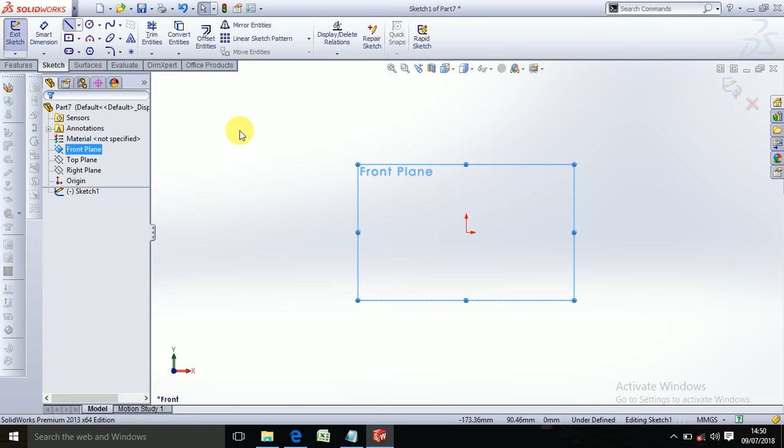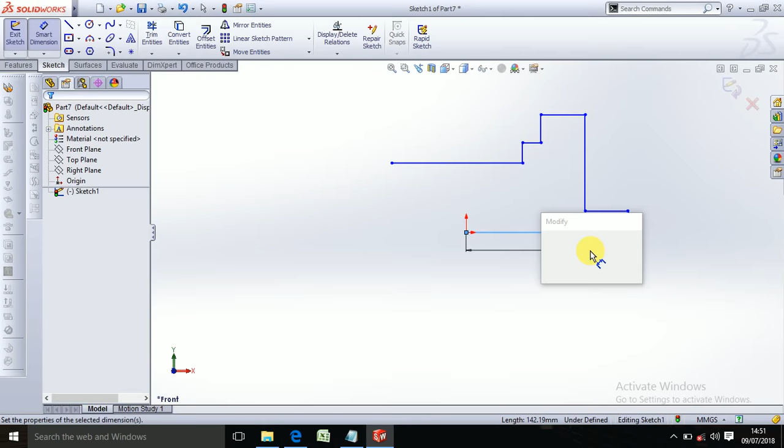Okay, exit. Now we will give dimension to it. This will be half of 208, so 104 mm. You will find the dimension in the PDF, so please have a look.

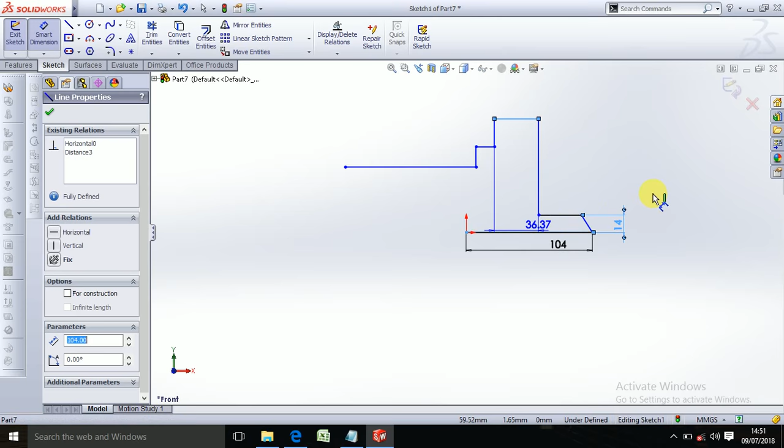And the distance from this line to this line will be 14 mm. The distance from this line to this line is 68 mm. We will call it 68 mm.

Okay, so this distance we have made like this. After that, we just take a center line from this point, from the origin point, going upward vertically.

So let's just select this line and make it vertical relation. Okay, we use trim and trim this entity. Okay, then we just draw this.

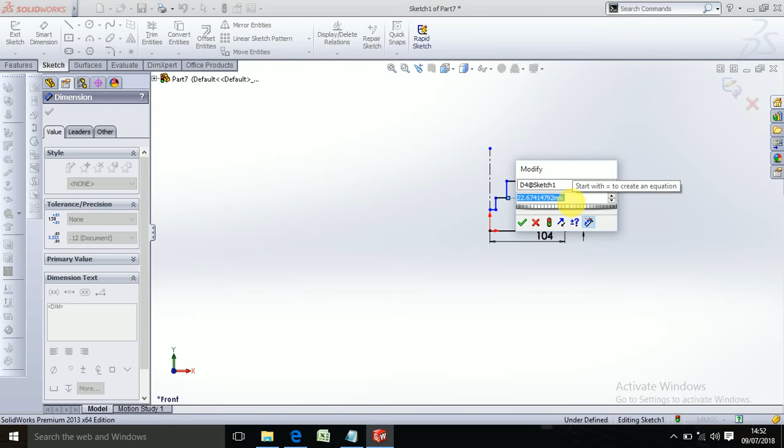Now we just take some dimensions. This line, this point to this point, the distance is 16 mm, I think. Okay, yes, it is 16 mm. Then from this point to this point, this line is 4 mm. Okay, yes, so this is the drawing.

Okay, so first we use this mirror command on these entities.

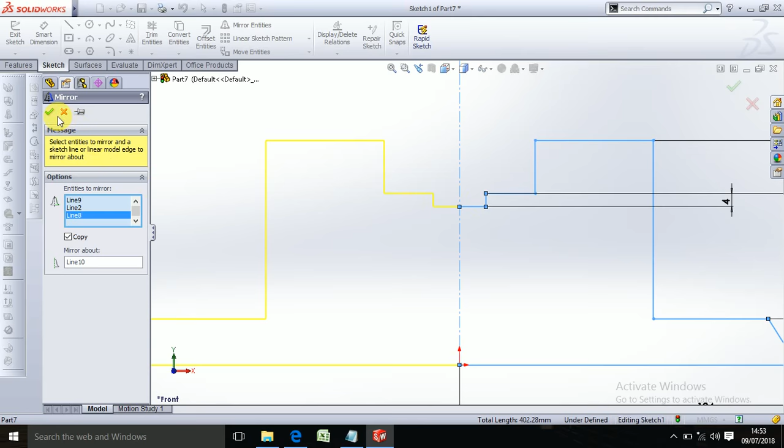Okay, so we just mirror this surface over this surface.

Again choose - first delete this, again choose smart dimension and we choose the whole length of the line, 208, because we need to show it fully in the dimension.

So let's take a center line about this point. Let's take a center line from this point, then smart dimension from this center line to this line. The angle will be 106.

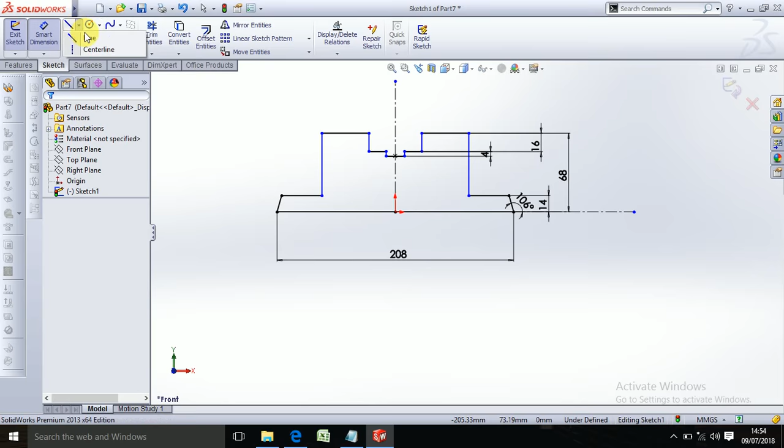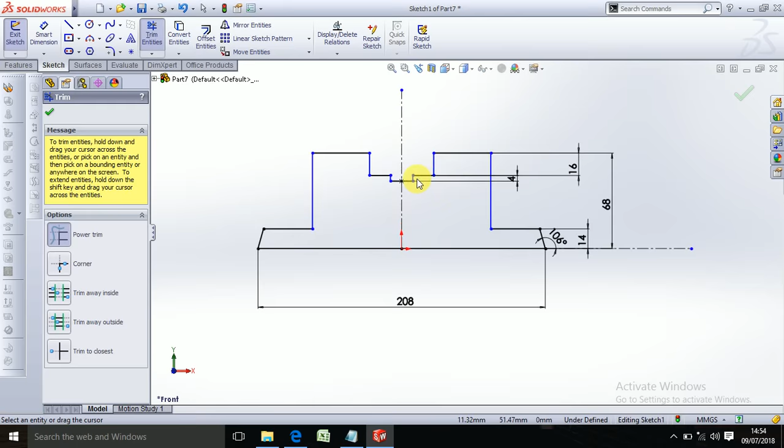And trim this entity. Okay, now we just take a circle over there from this point. Firstly we select this point. The distance from this point to this point is 56 mm.

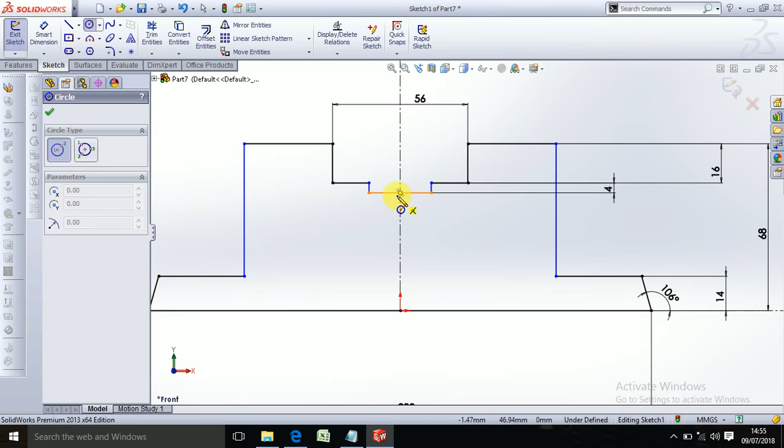Okay, and the distance from - yeah, just take a circle from this point, the radius of 24 mm. Okay.

Now just take trim command, or yeah, just take trim command and trim this entity, and then choose a center line from this point to this point, actually from this point to this point.

Okay, now choose a line from this point. Okay, again choose a line. Okay, from this point to this point, and again line command. Okay, sorry, from this point.

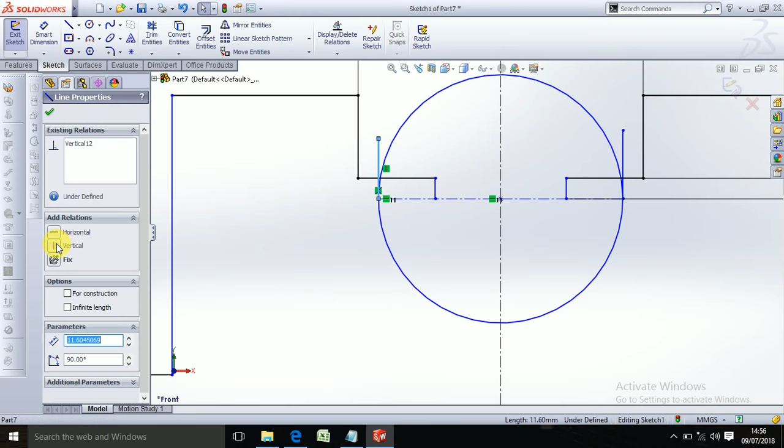Line command from this point to this point, make relation vertical. Okay, again this line, choose this line, make relation vertical. Okay, now use trim command and trim this entity. Okay, and we don't need this, so we delete this point.

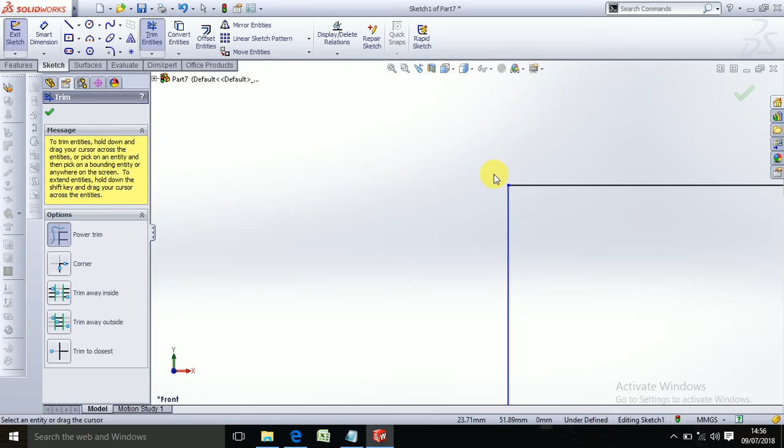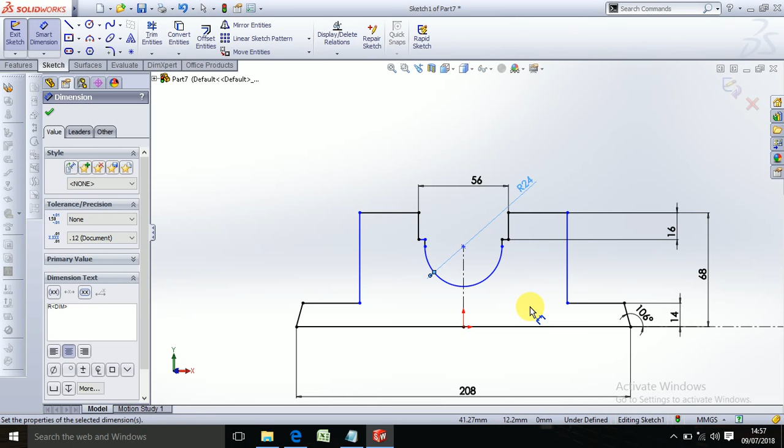So we just have to define this circle, radius is 24. We just have, okay, we have defined every single thing. So we can extrude this command, extrude this entity about this point.

Okay, let's use extrude, and we can extrude it up to 46 mm according to the drawing. 46 mm.

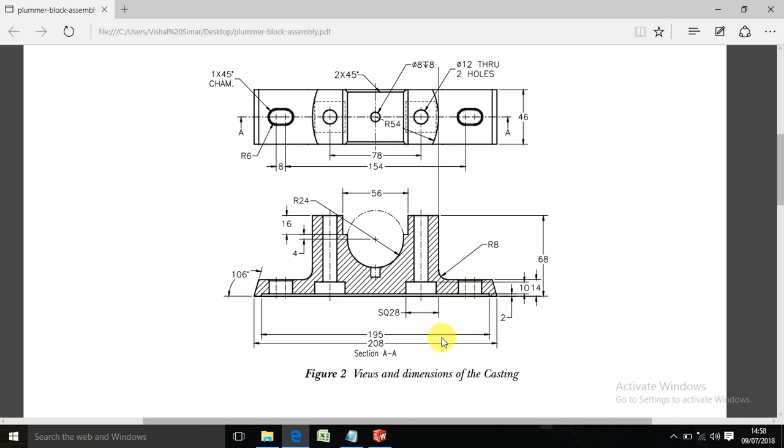So firstly we have to draw a shell, use this, and I use a center rectangle for this point, and from this point normal to, and yeah, just take a center line from this point, sorry, center line, okay, from this point to this point.

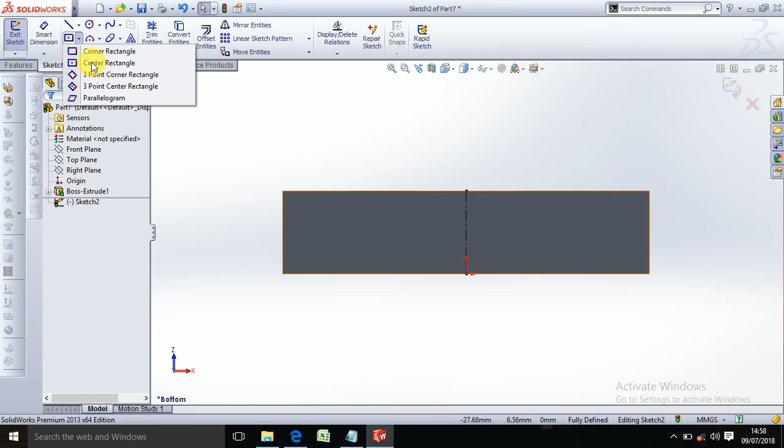Now it will be easy to take a center rectangle from the center point, center rectangle, and yeah, from this point to this point.

Okay, now just define this, take smart dimension, and I have to take this point to this point is 190 mm, sorry 195 mm. Okay,

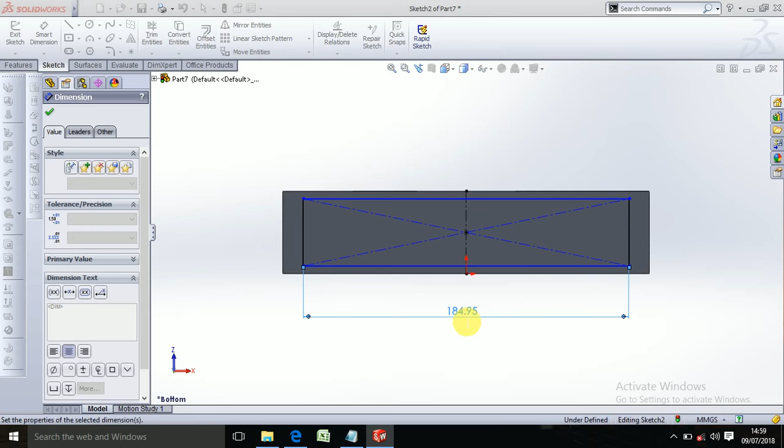and the distance from this line, again take smart dimension, sorry, sketch and smart dimension from this point to this center point or center line. It's just half of the 195, so 195 divided by 2, it's 97.50 already, it is okay.

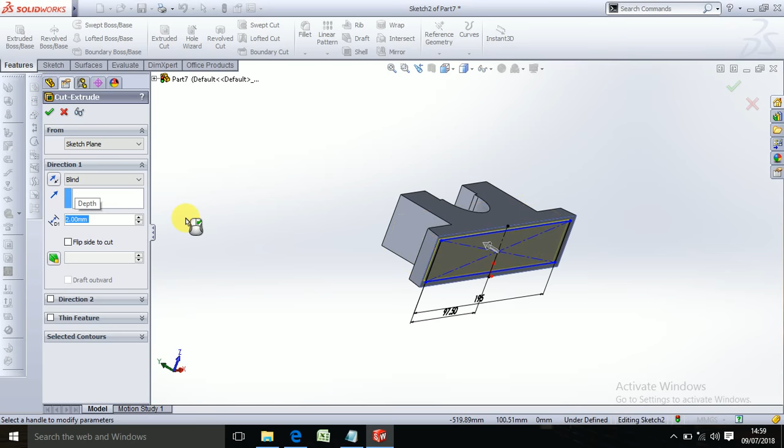So then feature and extrude cut. We can also use the shell command, but we use extrude cut over shell command here. Extrude cut to over 2 mm in the upward direction. Okay, so as you can see, there is a slot cut in this surface.

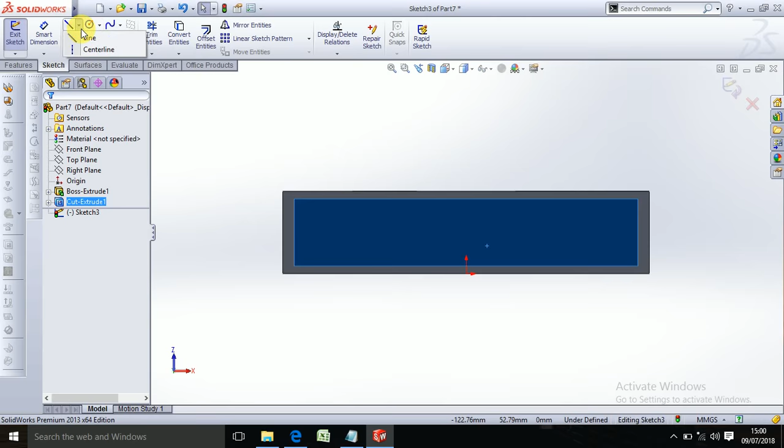So again sketch this surface, sketch normal to, okay. We can take a center line from this point to this point. Okay, now we will just take a center rectangle about this point, about the center of this point actually,

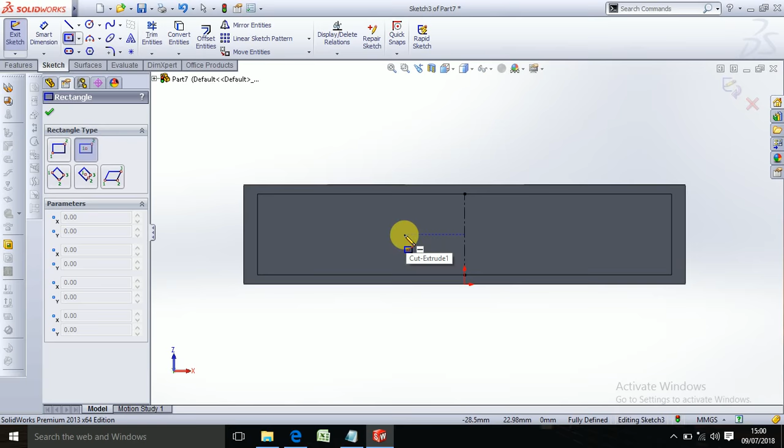yeah, center of this point, okay, and define it at 28 mm, sorry, 28 mm, okay, and this line will be 28 mm.

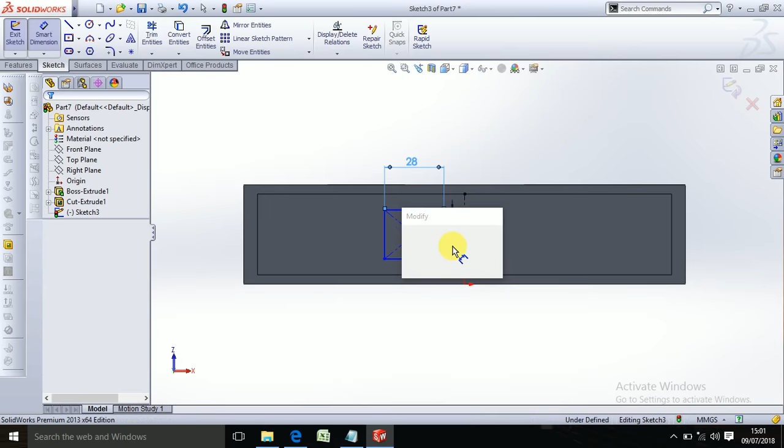Okay, the distance from center to this point will be 14. It's already 14, so we don't need to do that again.

We need a similar entity about this point over this surface, so mirror entity: point will be clear selection, and select the line, select the whole square, then mirror about this point. Okay, mirror done.

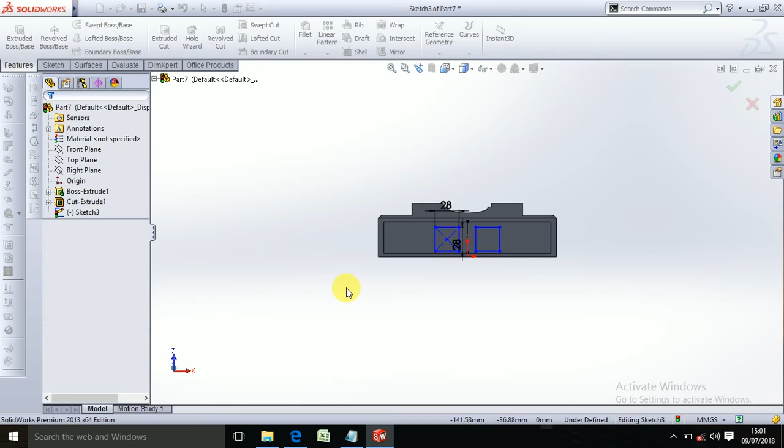So again use extrude cut, sorry, firstly we have to define another sketch, normal to, yeah, we have to define the distance from this point to this point. So we need

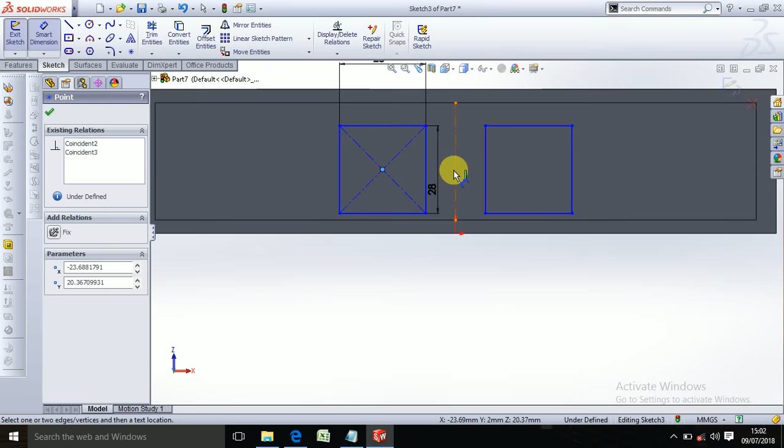from this point to this point, first we have to take dimension from this point, center point, actually smart dimension again, we'll just choose this line, this line will be half of 78 divided by 2. Okay, so as you can see, I have given dimension only on this side, and as it is a mirror entity, it will take the dimension automatically.

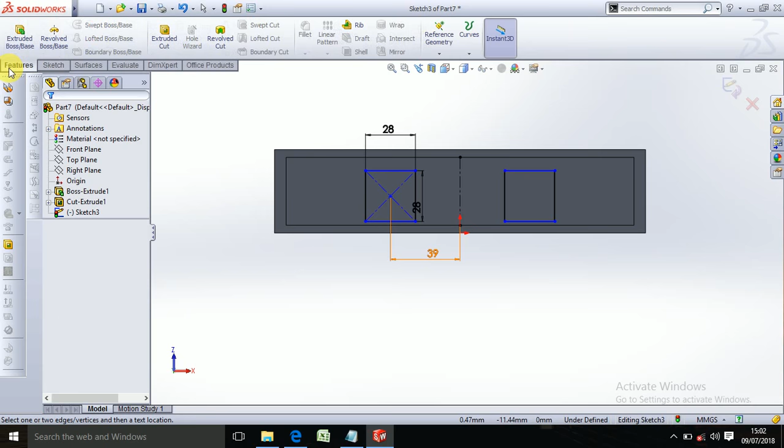Okay, then we extrude cut it. You have to draw a slot up to 10 mm. Okay,

we just have to draw, okay, now we have to draw a slot over this point, so I select this line again, sketch normal to.

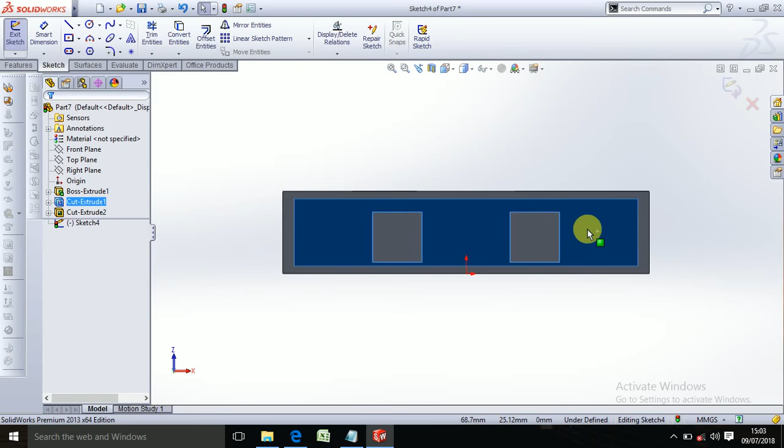So we can take a slot from this straight slot, and we can draw this from one point, define another point and the radius. Okay, so we can take a center line from this point,

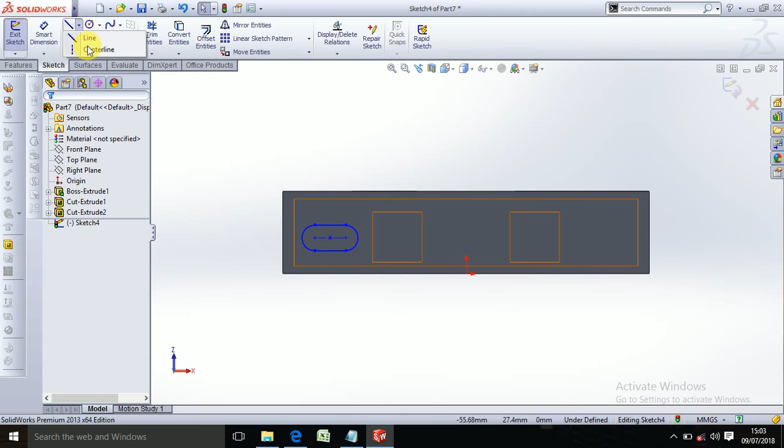we need a center line from this point to this point, and okay, now the distance we have given from this point to this point will be 8 mm only. 8 mm.

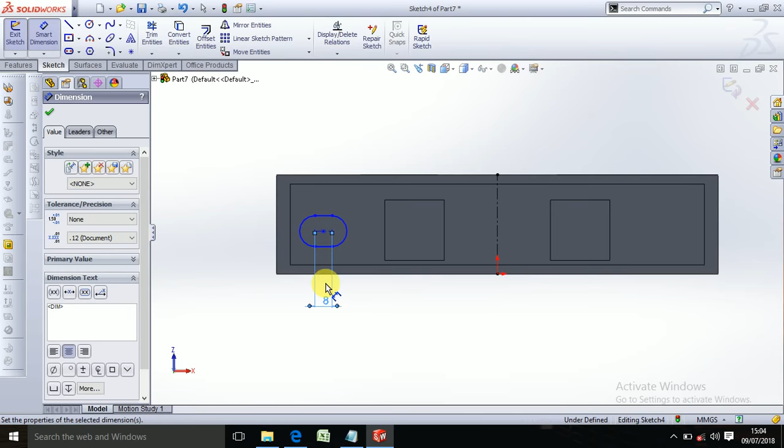Okay, now the radius of this circle, uh, this arc will be 6 mm. Okay, and this will also be 6 mm by default. Okay,

and again use mirror entity, and I want to mirror this slot over this side. So again use center line and mirror about.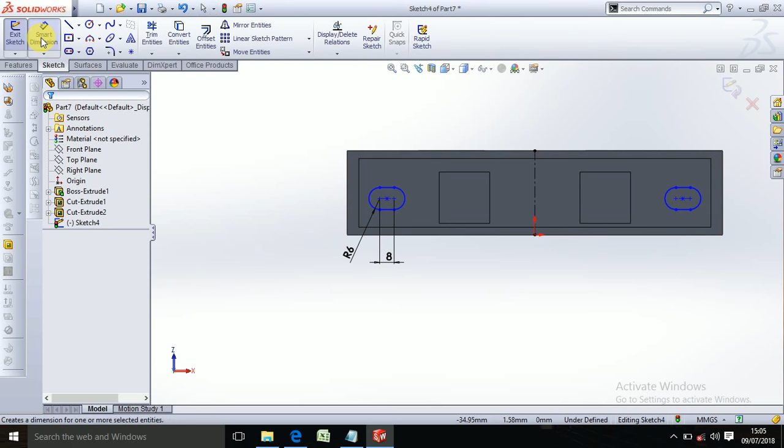Okay, so the distance from this point you have given, center from this point to this point we have a distance of 154.

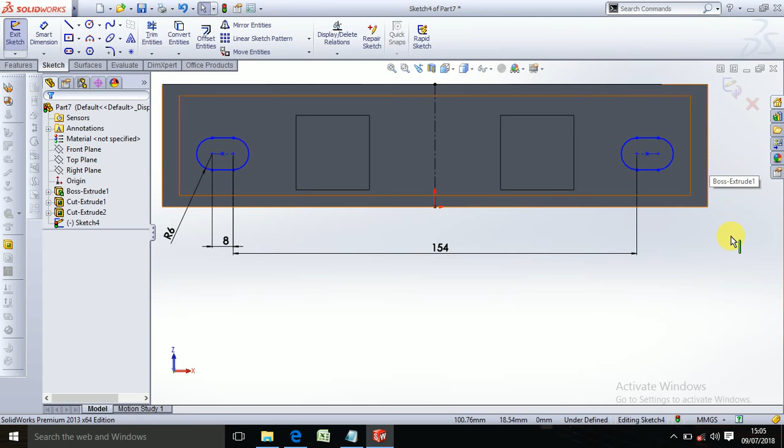Okay, so we don't need to take distance from this point because we take the distance from middle to middle, so it is already aligned. So then use feature, extrude cut, and just select through all. Okay, so we have created the slots in that area, just like that.

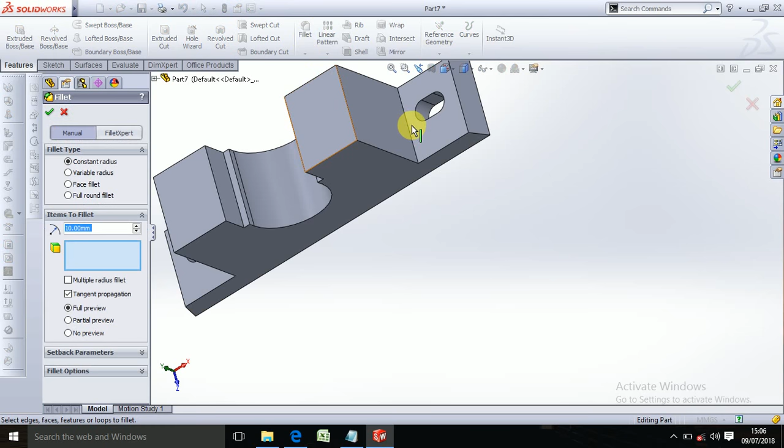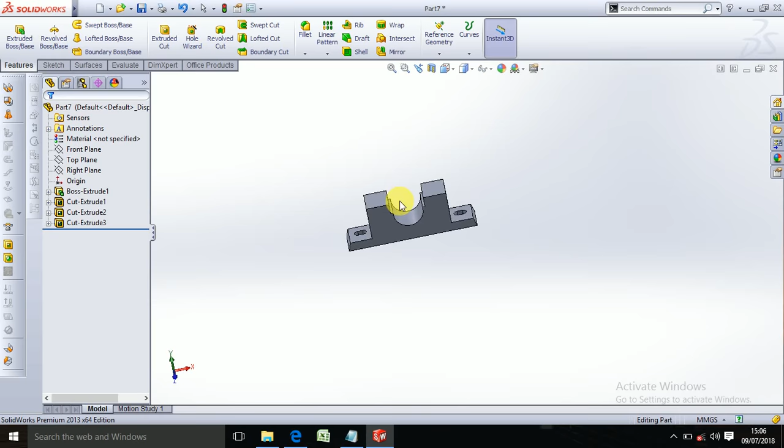And we have also to do something. Take fillet command over this line, and... I think it's not fillet command actually. So this is the main base part of the drawing. We just have to create a part over here also. So I think, yeah, this is the base part, and according to the drawing we have drawn it.

So basically now we will draw the extruded cut part from this point. This is the top view. We have cut the slots. Now we have to create an arc over this point from this to this, and also two holes from this point. So click on OK.

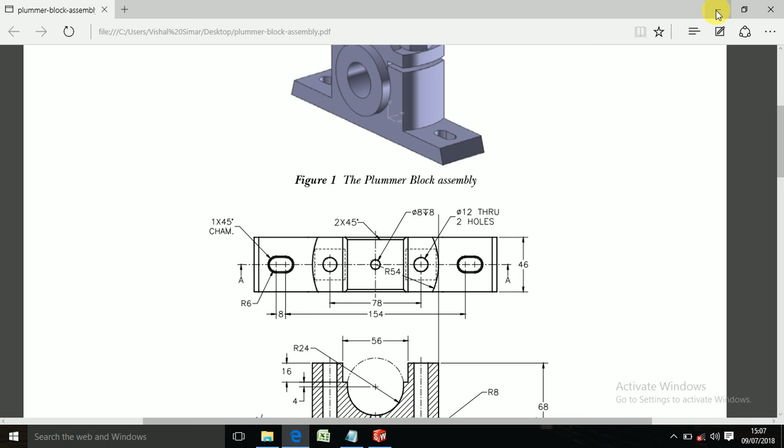So from this point to this point we need it. Okay, now take this point as sketch point. Okay, yeah, this point to sketch point. Okay, exit sketch and take this point to sketch.

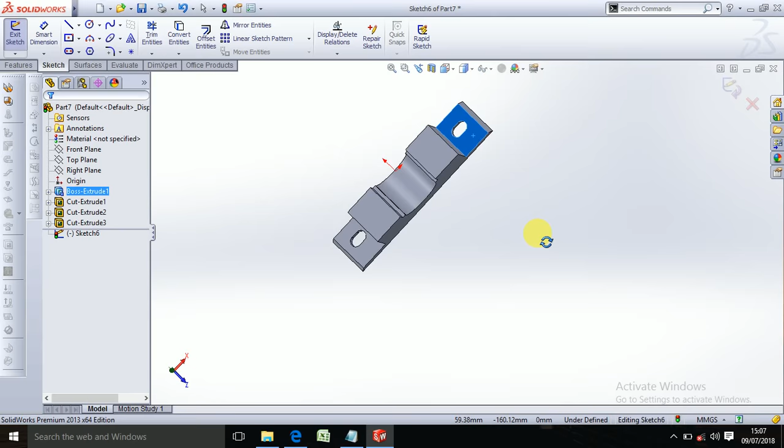Okay, then take normal again. Now we draw a center line from this point to this point. Okay, now just take a circle from this point, from the center of this point, with a radius of 54. Okay, so we drew it over that surface.

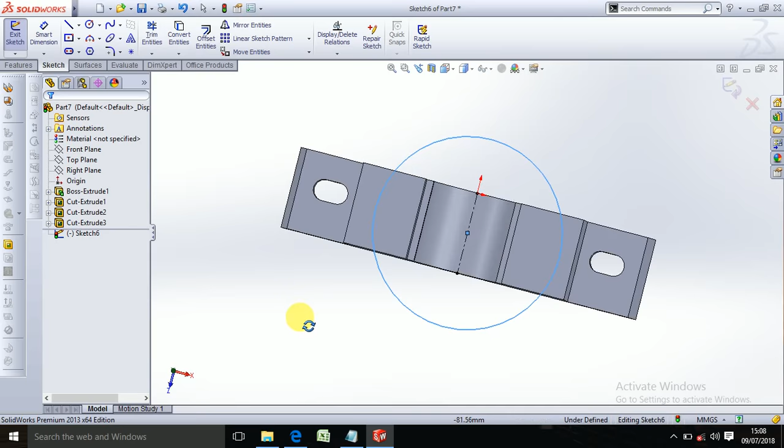Okay, first we draw... let me delete this, delete. Okay, now first we have to draw a circle over here. This is sketch number 6. Let me exit this sketch and delete this.

Okay, yes, now click on this surface, sketch, and now take a center line about this point, normal to. Okay, center line from this point to this point again. Okay, now again take a center line from this point to this point.

Okay, now take a circle over here and a circle over here. Select one circle, press Ctrl and select another one, and make relation equal. Okay, now use smart dimension. The distance from this point to this point will be, according to the drawing, 78 mm.

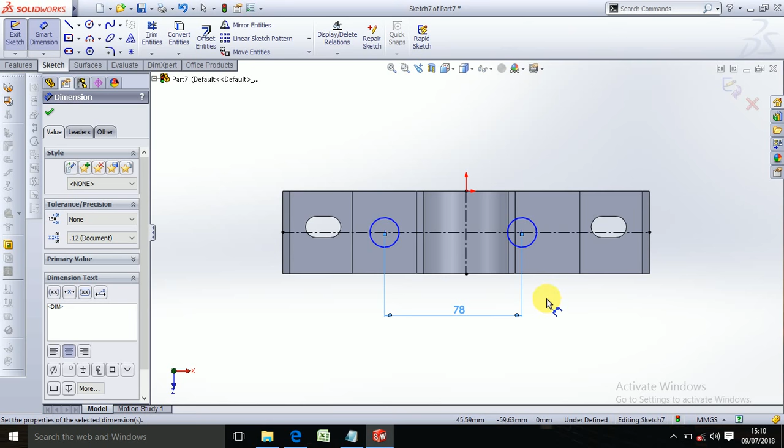So we just have to draw the distance from this to this as half of 78, because it's not aligned properly. 78 divided by 2. Okay, now it is symmetric.

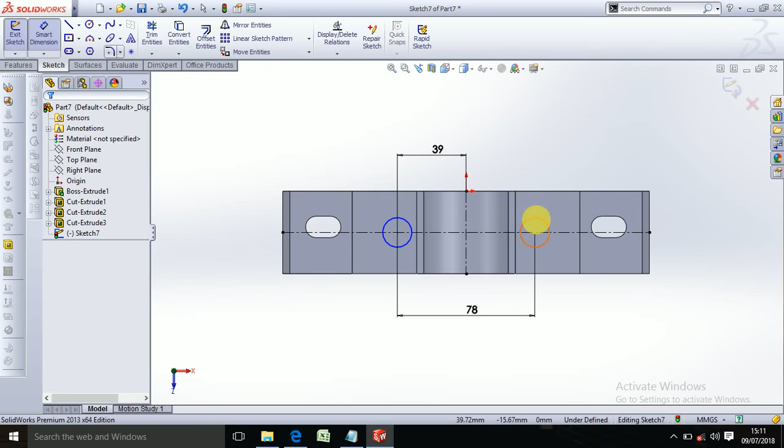Okay, now again choose smart dimension and choose the dimension of either one of the circles. The radius of that circle is 6 mm. Okay, actually the diameter is 12 mm.

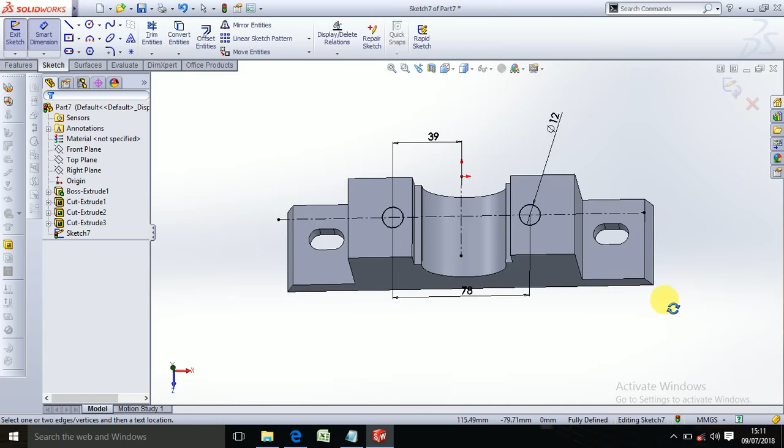Yep. Now we just have to cut it through, extrude cut this point up to... not up to this, up to the surface. Actually 68, and we have to take 68 minus 10, so it will be 58 mm by calculation. We have to take it above the square, so it's 58 mm.

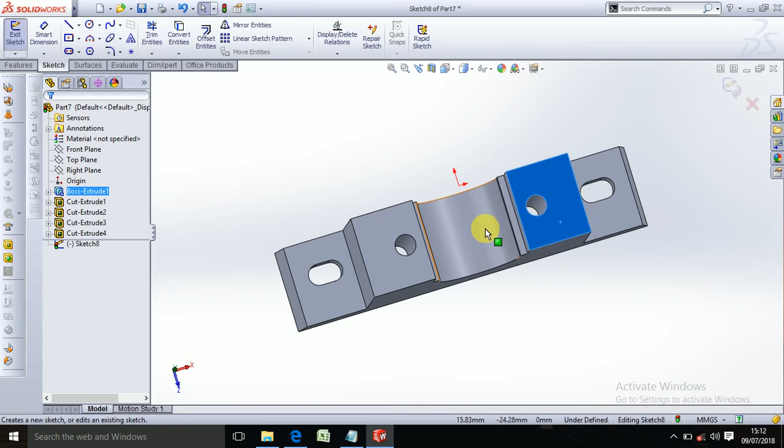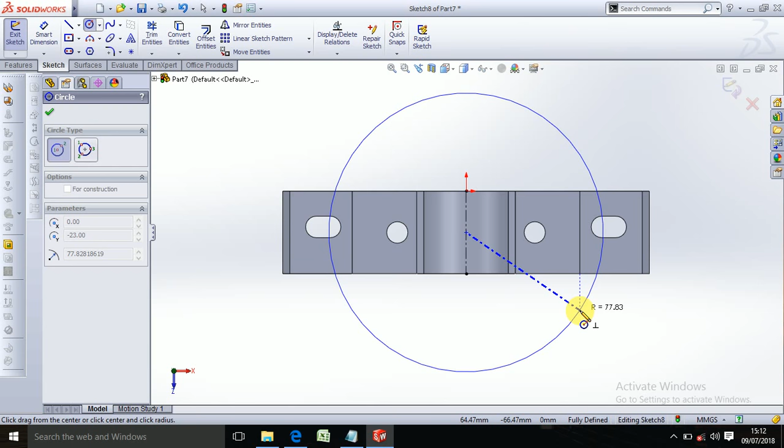Okay, about the center point, again take a center line from this point to this point. Again take a circle over this point. The radius of that circle will be 54 mm as per the drawing. Drop this 54 mm.

Okay, again choose line command. Actually we can just extrude this point, or we can just take an arc from this point. No need of a circle. Delete this circle.

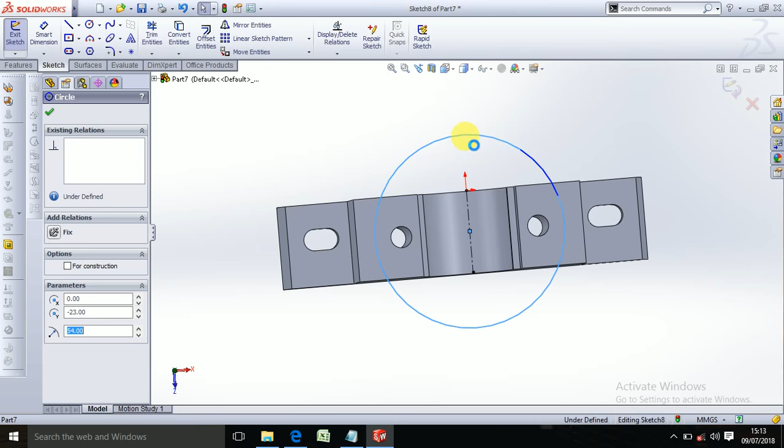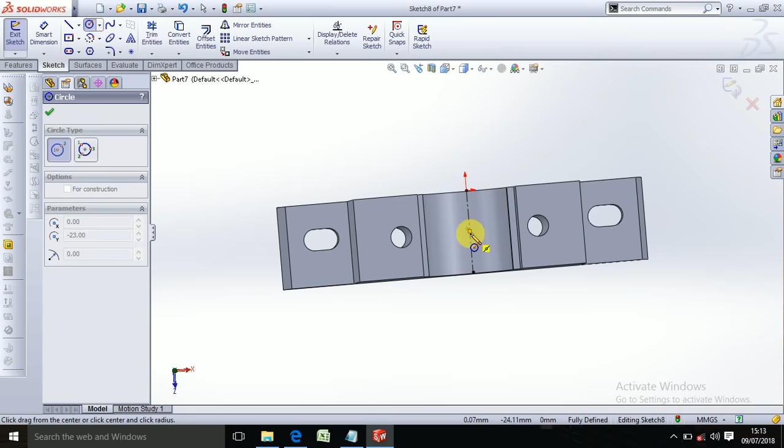It's taking some time. Okay, we need a center point arc from this point to this side, over this side. Okay, again choose a center point. Let me take just a circle over there, from this point to this point. The radius will be 54.

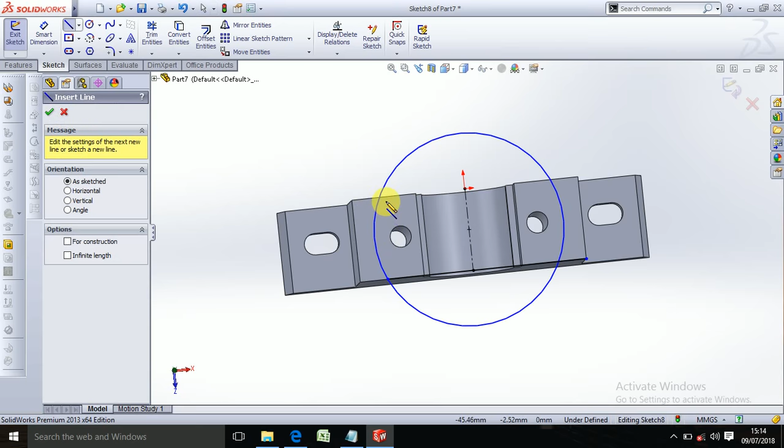Okay, now just let me connect these points from this point. Okay, from this point to this point. Okay, from this point, and again line, choose line command, from this point to this point.

Okay, now just use the trim command and trim this entity. Let me trim this entity as well. Okay, so this will be the drawn property. Then feature and extrude cut.

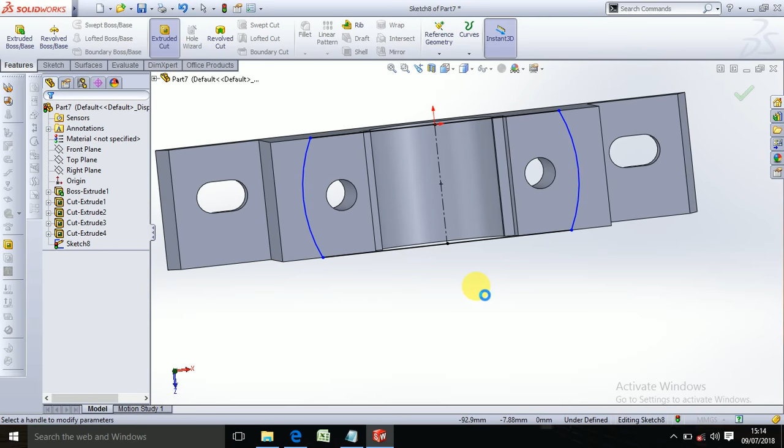Then cut this surface through... 14. So I'll cut this point to 68 minus 14, which is 54 mm. Okay, choose. Okay.

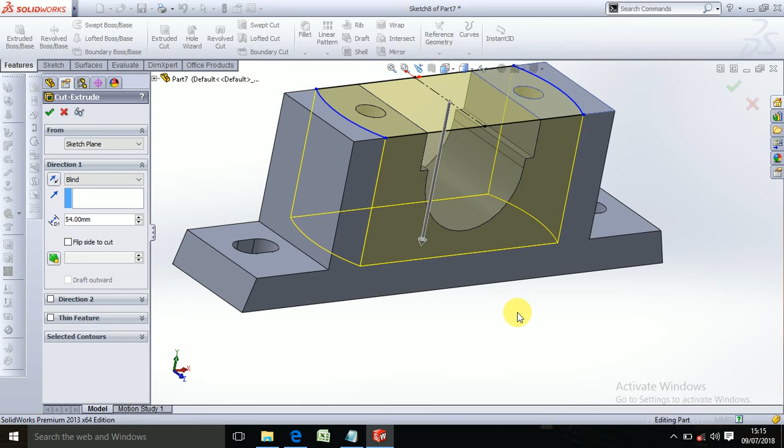Oh, actually I just cut the whole part. It's not needed.

We can edit this part, edit feature, or I can edit the drawing. So I will go on plus button and then edit sketch, and then normal to.

Okay, normal to. Now I just have to take a trim command again, and trim all these lines, and again take a line from this point to this point, from this point to this point, again take line command, enter, from this point to this point, and this point to this point.

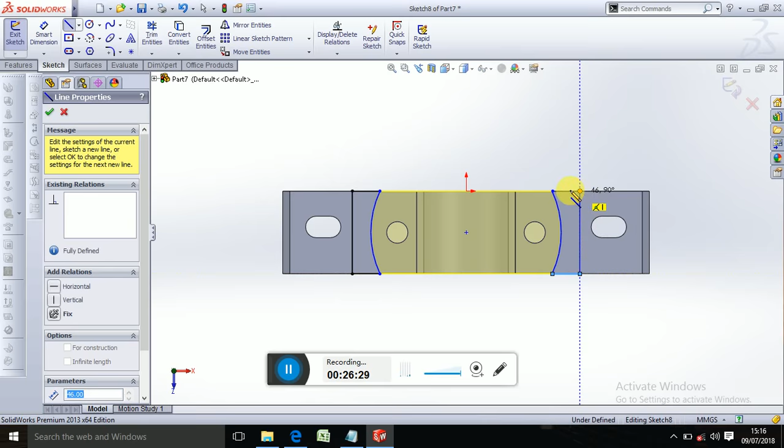Okay, now it's cool. Now exit sketch. Okay, it is giving some errors, so I can close this.

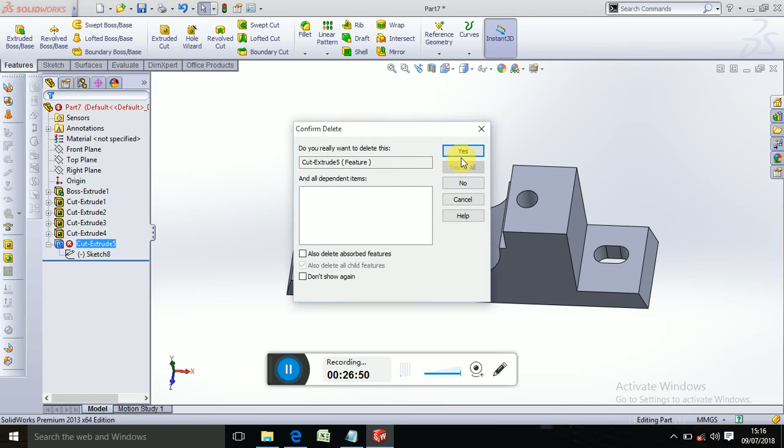So I will first delete this feature. Okay, so my drawing is ready. Now I can use the extrude cut command. So I'll first select the sketch.

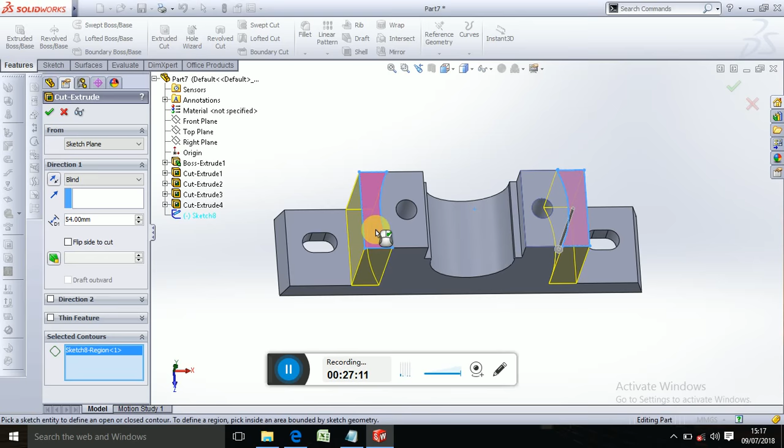So this is my sketch. Okay, so this will be the point, and select these surfaces. Okay, and up to 54.

So yeah, this is the complete part we were drawing. So actually we can take the fillet command again, about this point, and about this point the radius will be 8 mm.

Okay, so this is the base part of the Plummer block assembly. This is almost ready. Yes, so we can save it.

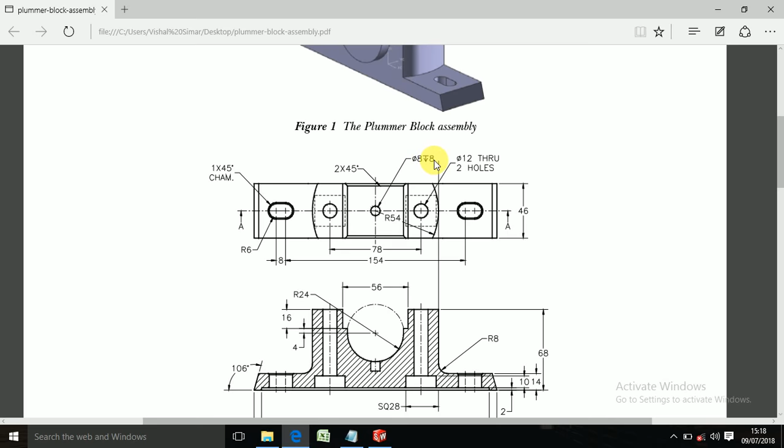We just have to do something more. If you have a look on the top view, there is also a hole in the middle of the surface, which is of dia 8 mm and 8 mm deep. So we just click on that surface and I choose plane.

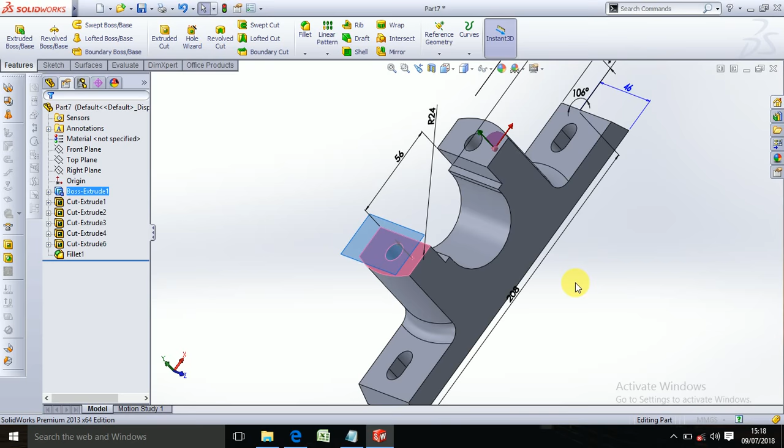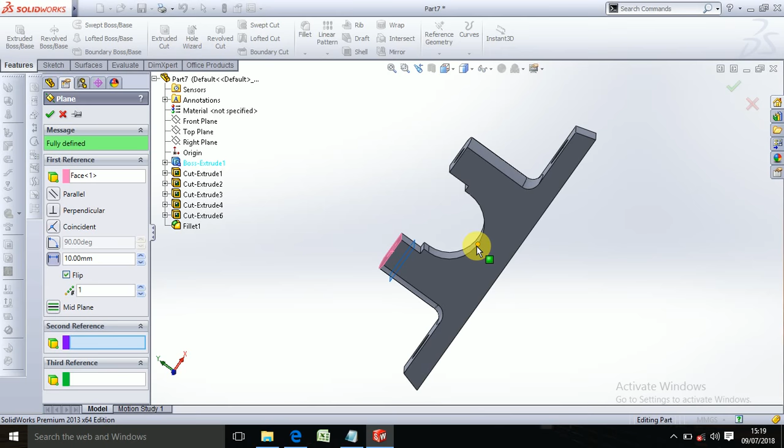So it's taking some time. I'm sorry about this. Okay, flip this towards downward, and let me calculate the distance from this point to this point. So the distance from this point to this point is 16 mm. 16 plus 4 mm, 16 plus 4 mm, and yeah, 4, it's 20, and the radius of the circle is 24.

And the radius of the circle is 24, so it's 44 mm I think. Let me just type here 44 mm, enter. Yeah, so it's about this point I think.

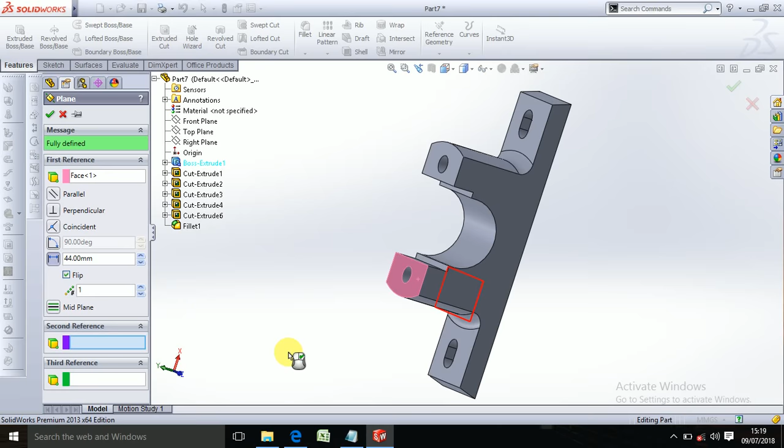Okay, let me correct myself and delete this. Phase 2, delete. Okay, so actually I had taken something wrong, because it's not 44, I think it will be 40. So let me type here, and the 40 will be, I think, yeah, it is okay. Then okay, if anything goes wrong we can also edit the feature, so not to worry.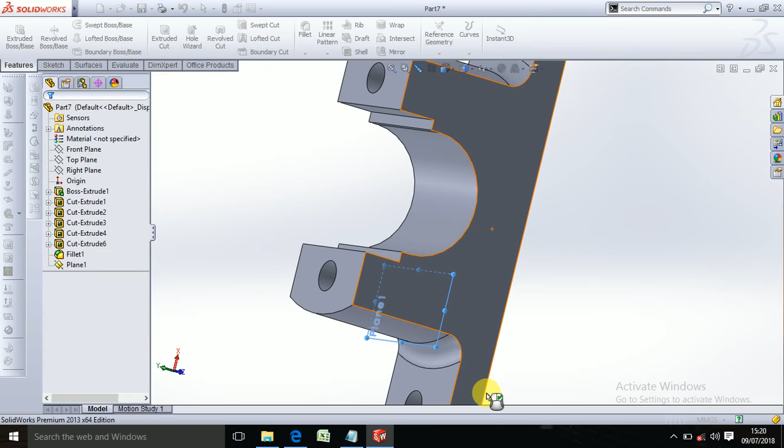Now choose that plane. Okay, sketch normal to, it's hanging a bit, so okay, it's normal to.

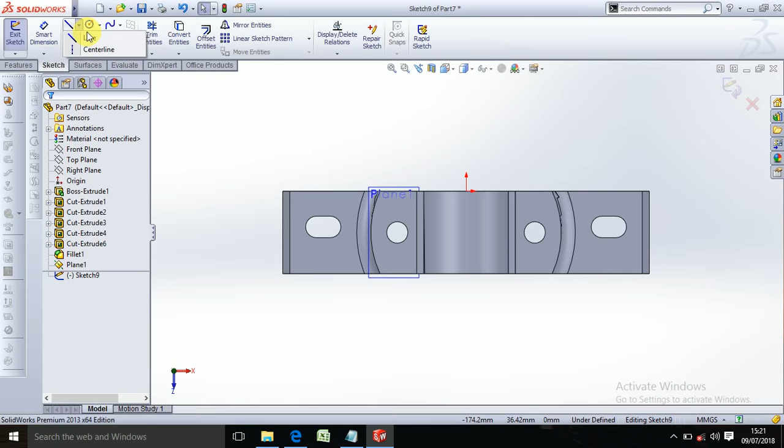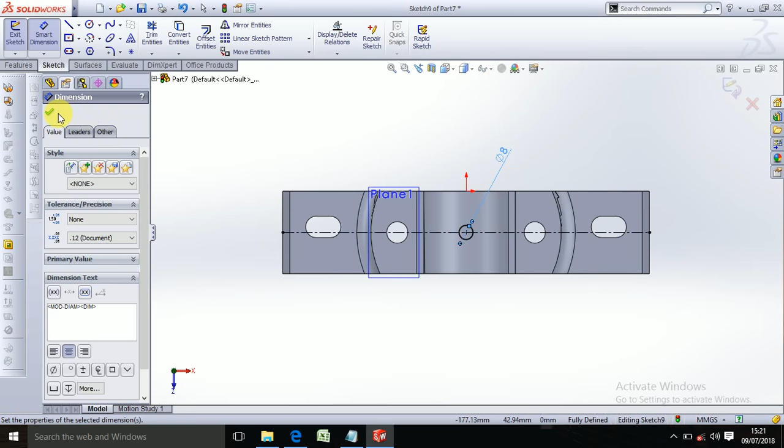Now just take a center line from this point to this point. Okay, and we have the center point, and choose a circle. We have to draw a hole over this point. The diameter of this hole will be 8 mm. Okay, and we have to cut it through, I think 8 mm. Yeah, it's good.

Yeah, actually I think we just projected the plane a little bit up from the surface here, so it's okay, it's not a problem. We just use feature and extrude cut.

Okay, so we need here 8 mm, so 8 mm is that, and I think this distance, if I take a line here, first sketch and again sketch, and from this point, actually I'll sketch this point.

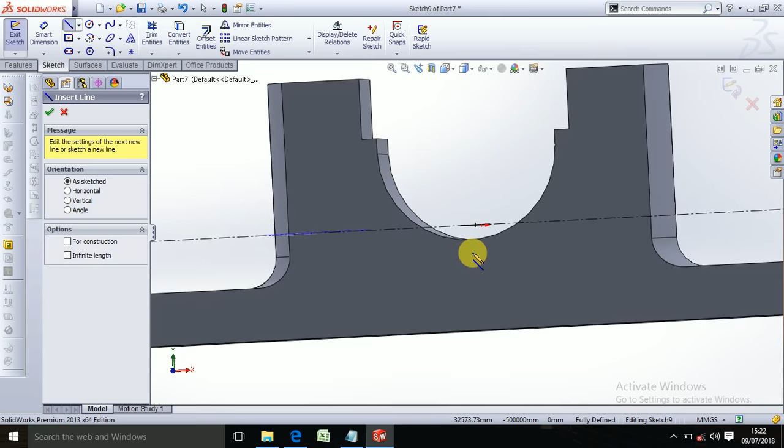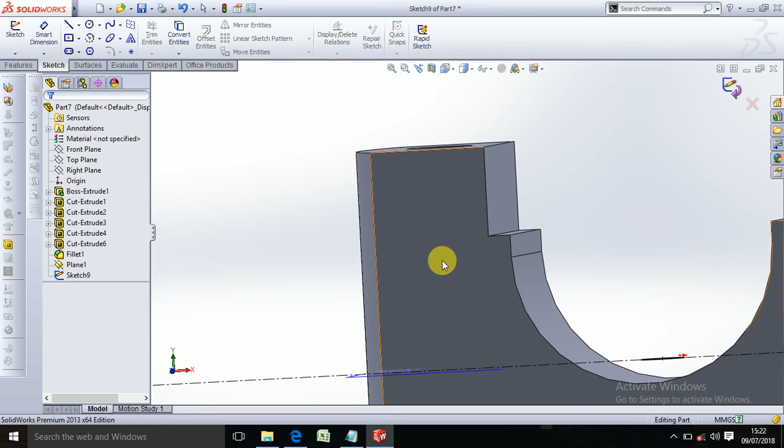First exit sketch, I'll check out with the distances, sketch over this surface. Okay, take a line from this point or from this point. I'll take a distance from this point. Again take a line, it's not taking the line. Again exit sketch. Okay, sketch.

Take line command from the center point to this, and I take smart dimension. Okay, from this point to this point I need to take 44 mm. So I'll delete this line.

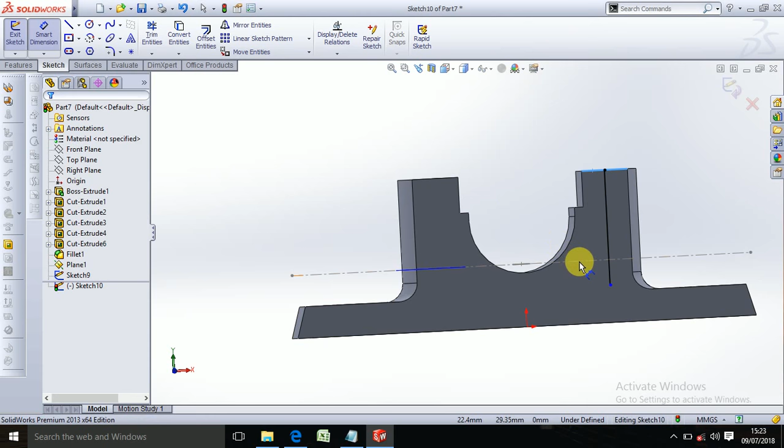Again exit sketch, and go to this sketch, edit sketch. Okay, so we can edit that plane also, so we click plane or sketch. Okay, so it's not a big deal, it's 44 mm actually, so sketch. Okay, sketch.

Okay, now use feature command. My PC is lagging a bit. Okay, extrude cut this circle through this point. I'll take it as 13 mm or 12 mm.

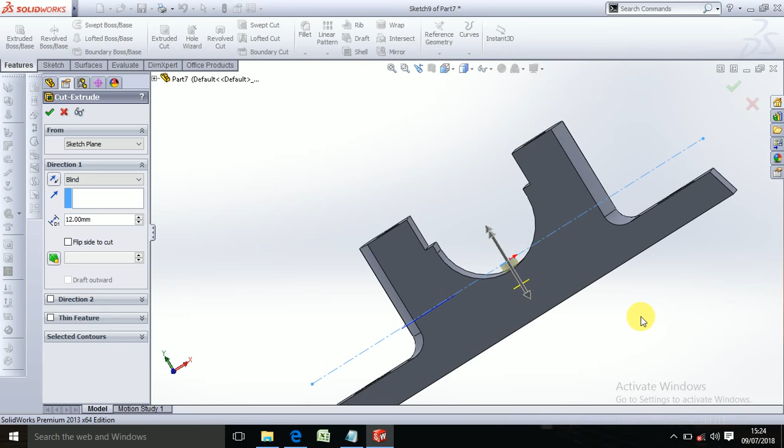Okay, then okay, yeah, so we extruded cut a hole from this surface. Then I'll hide this point or plane. So guys, this is the first part we have to make for the plummer block assembly.